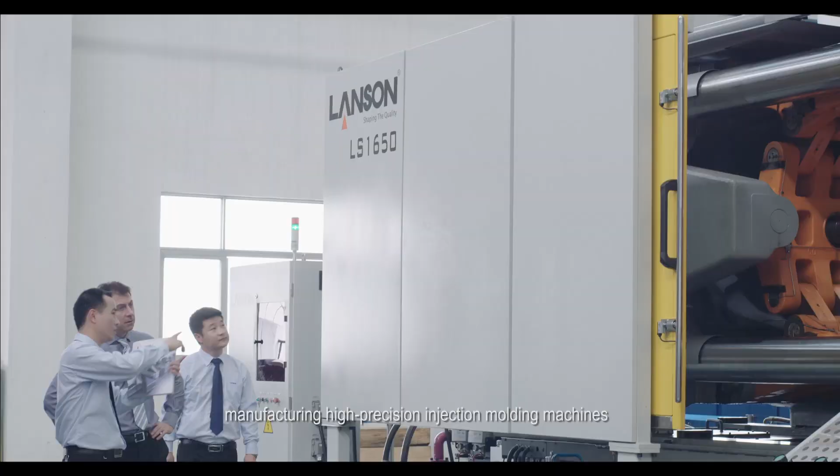Since its inception in 2005, LANSON has established a professional team of talents combined with a solid technical strength of R&D, manufacturing operations, marketing and after-sales service capabilities. It has focused on sustainable development in manufacturing high-precision injection molding machines and high-performance aluminum magnesium alloy die casting machines as its leading products. It aims to develop and manufacture high-speed, high repeatability accuracy, high stability, high precision and energy-efficient injection, as well as die casting molding machinery.

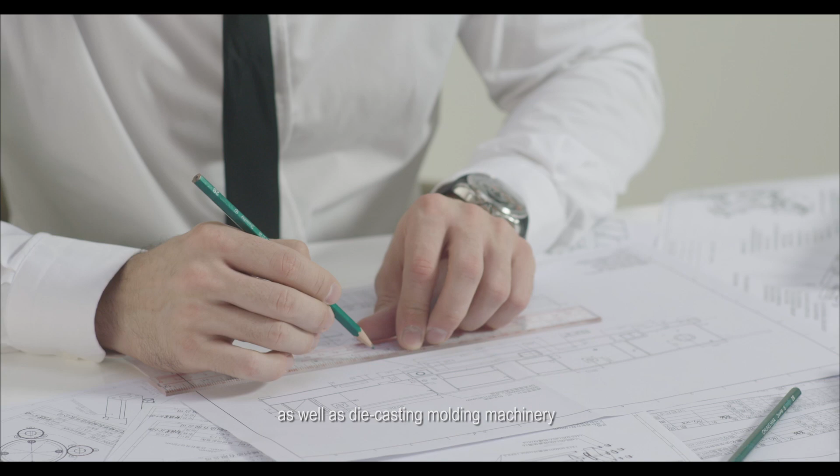The company has obtained ISO Quality Management System certification, Industry Quality Management System certifications, and numerous industry honors.

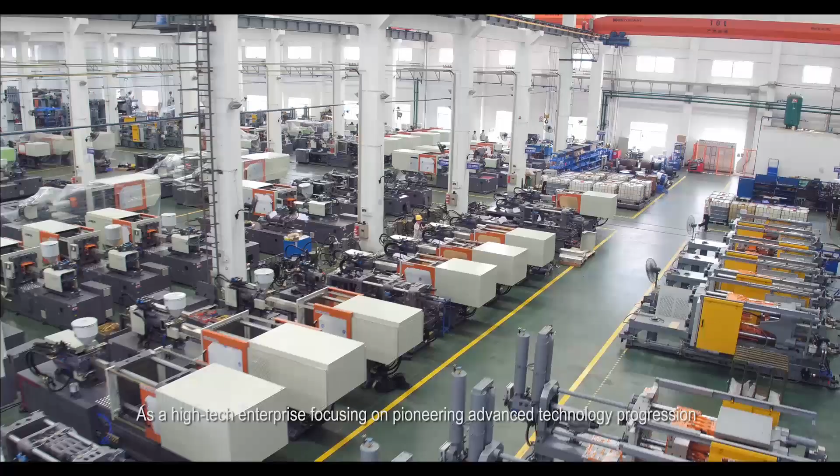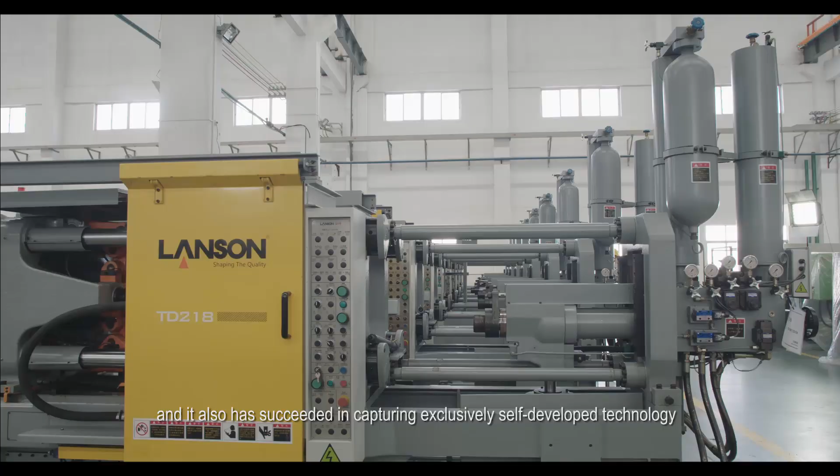As a high-tech enterprise focusing on pioneering advanced technology progression, LANSON has scored first by being the first in mass production with single-cylinder injection molding machines among industry peers. It also has succeeded in capturing exclusively self-developed technology and production capacity in building high-performance and large-scale die-casting machines. The company has achieved an annual output capacity of more than 4,800 injection molding machines and more than 2,000 die-casting machines. And the quality of all products has reached international standards and complied with industrial regulations.

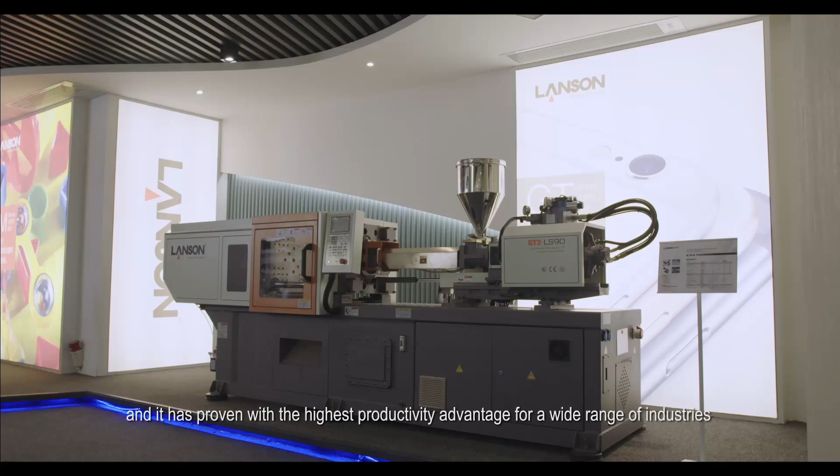As one of the industry's well-known brands, LANSON has always made its presence found in several large industry exhibitions and the mainstream media across the world. Both domestic and overseas customers have been wowed by the company's products, which have been exported to numerous overseas countries and regions, and it has proven the highest productivity advantage for a wide range of industries, as LANSON aims to work and grow together with all our valuable customers.

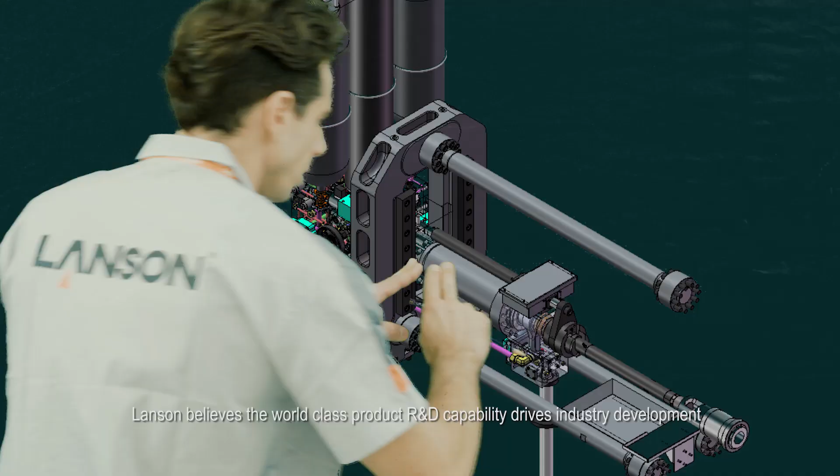LANSON believes that world-class product R&D capability drives industry development. LANSON's professional R&D team owns more than 80 senior technical engineers, awarded almost 100 national patents.

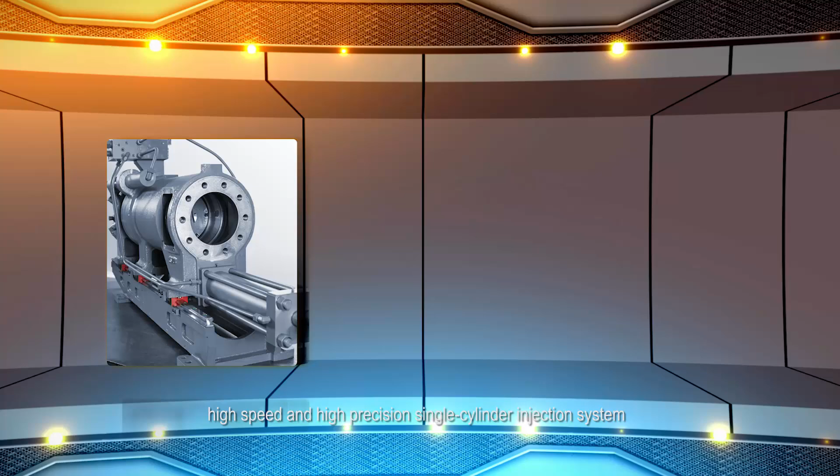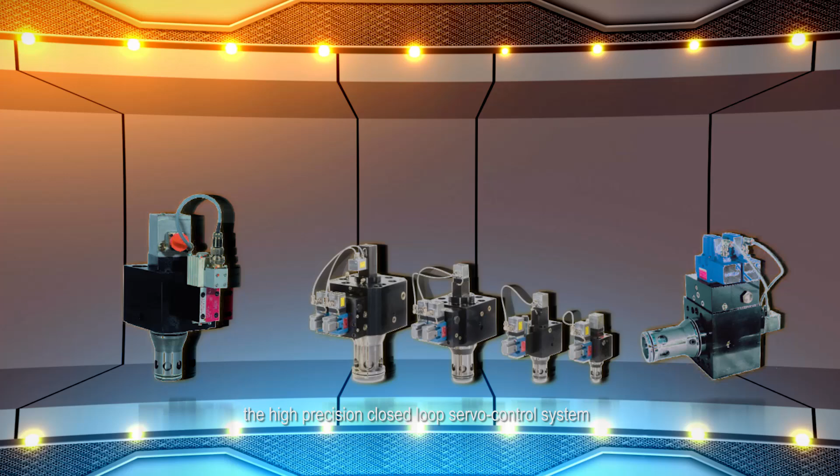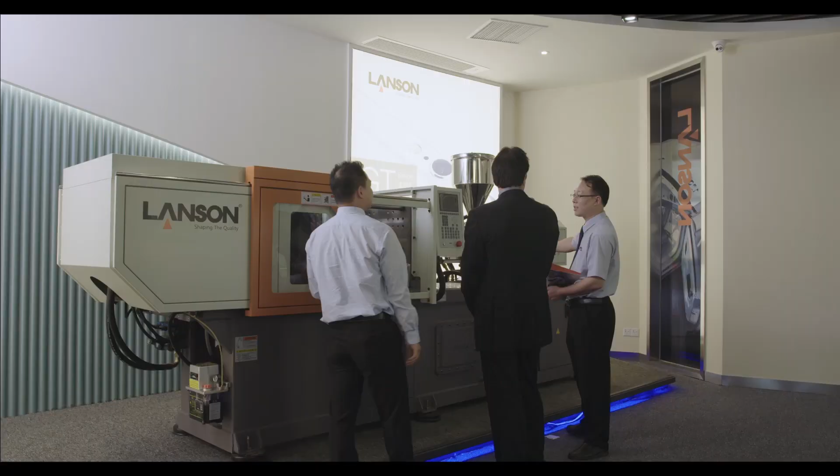The scope of patents includes high rigidity, high strength and high precision of the clamping unit, high speed and high precision single-cylinder injection system, the precise microcomputer control system, the high precision closed-loop servo control system, the stable and reliable injection system, the modular type energy-saving high-response oil circuit design, etc. And as well providing efficient one-stop service for customized application solutions.

LANSON holds expertise in manufacturing and supplying more than 15 series and over 100 high-quality prototypes of injection molding and die casting machinery, including the precision single-cylinder injection molding machines, the standard dual-cylinder injection molding machines, the large 3-platen injection molding machines, the large dual-platen injection molding machines, and etc.

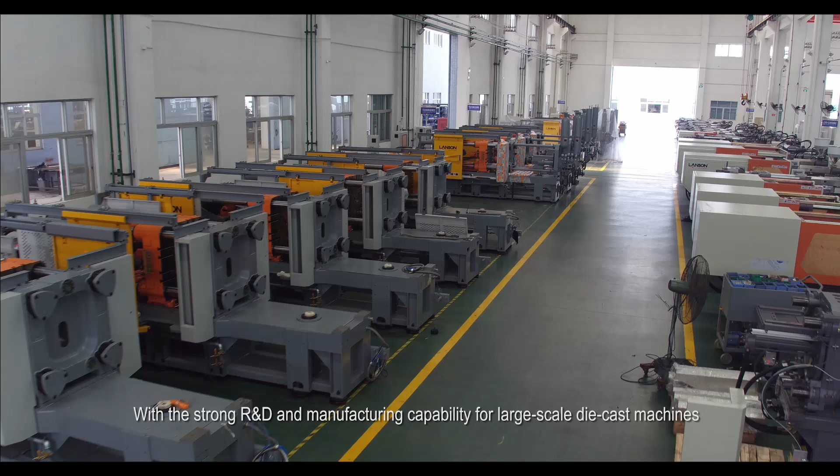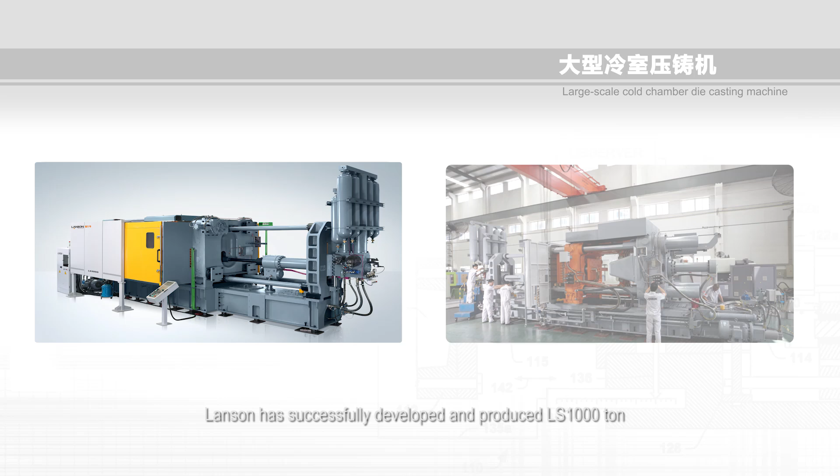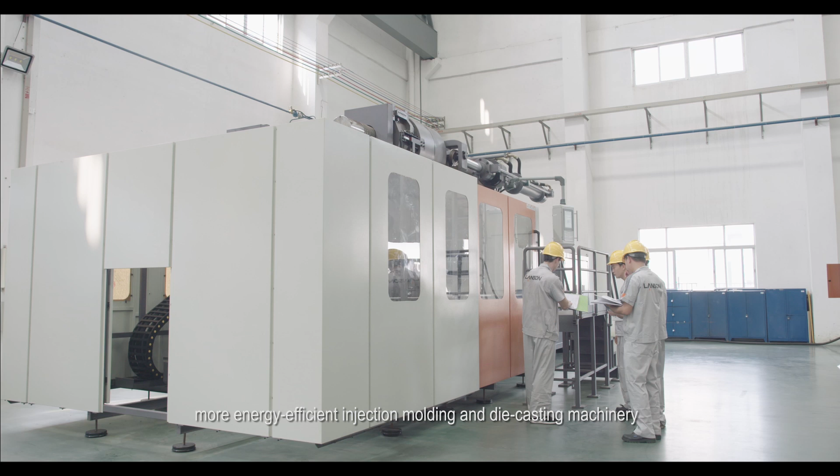With a strong R&D and manufacturing capability for large-scale die-casting machines, LANSON has successfully developed and produced LS 1000 ton to LS 5000 ton cold chamber die-casting machines. LANSON is committed to constantly developing high efficiency, high stability, high precision, high speed, and more energy-efficient injection molding and die-casting machinery to offer customers with more competitive product solutions.

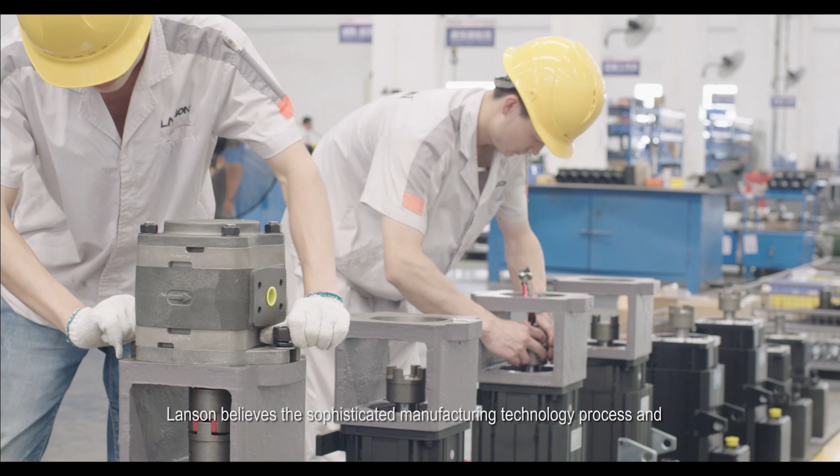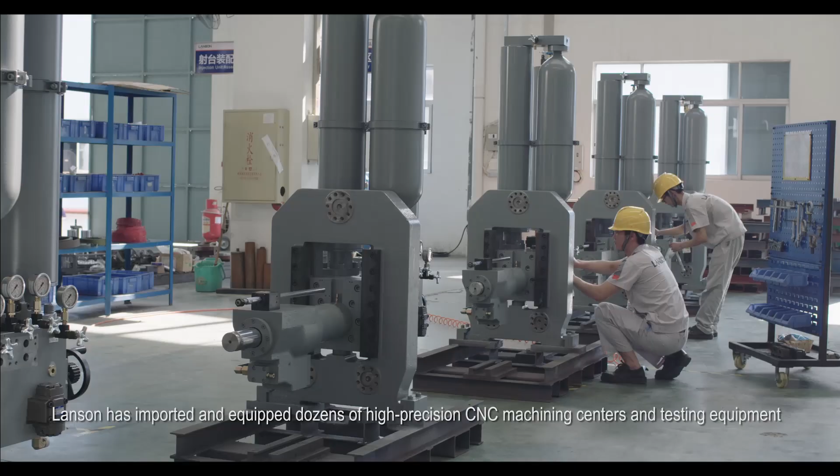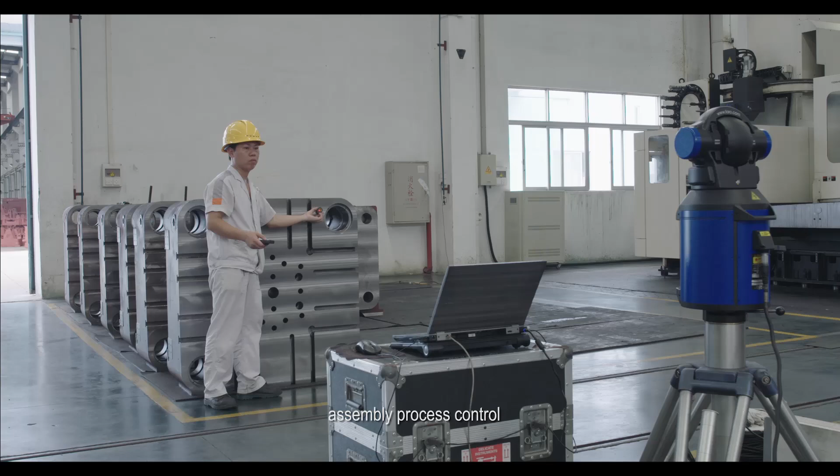LANSON believes that sophisticated manufacturing technology, process, and premium quality assurance generate customer trust. LANSON has imported and equipped dozens of high-precision CNC machining centers and testing equipment, and professional assembly technology and strict quality assurance systems have been placed in the workplace. The robust manufacturing process control, assembly process control, and manufacturing monitoring assurance ensures reliable and premium product quality.

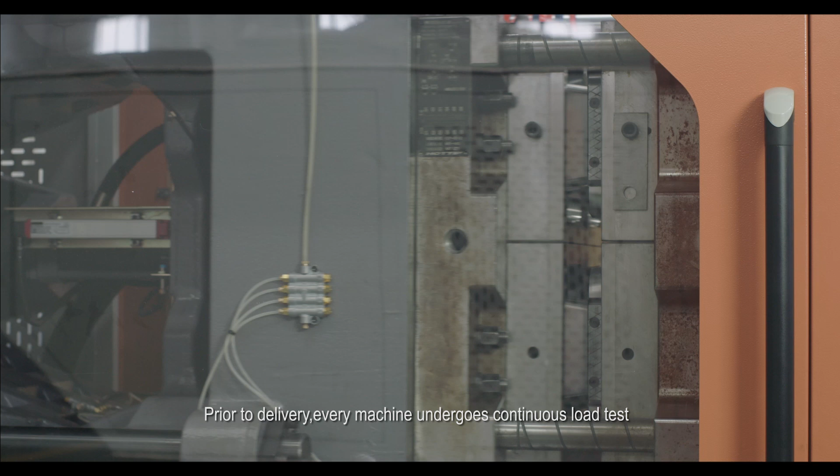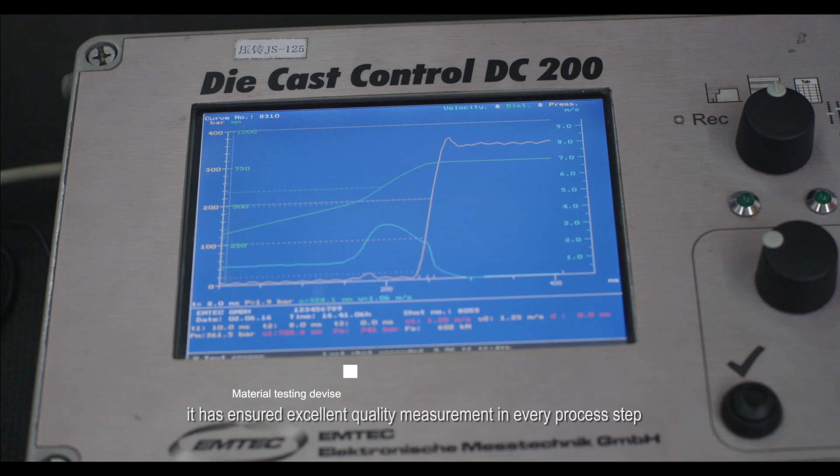Prior to delivery, every machine undergoes continuous load test, endurance test, and other strict equipment testing and detection. It has ensured excellent quality measurement in every process step, following scientific and strict regulations and instructions, to ensure perfect delivery of each product.

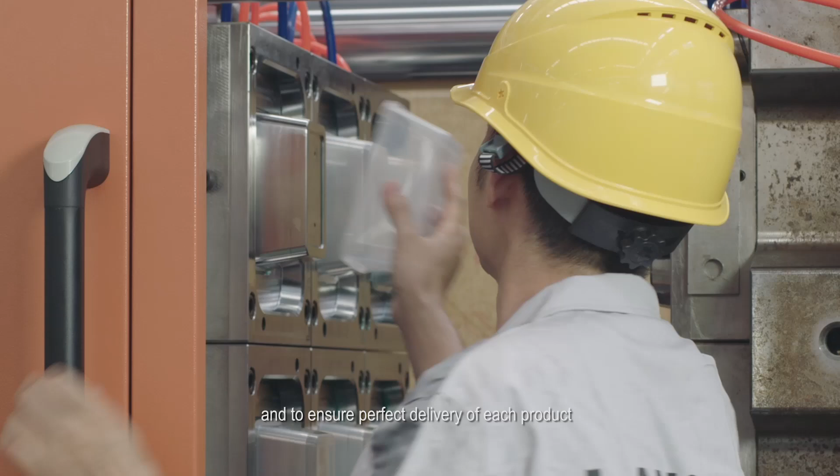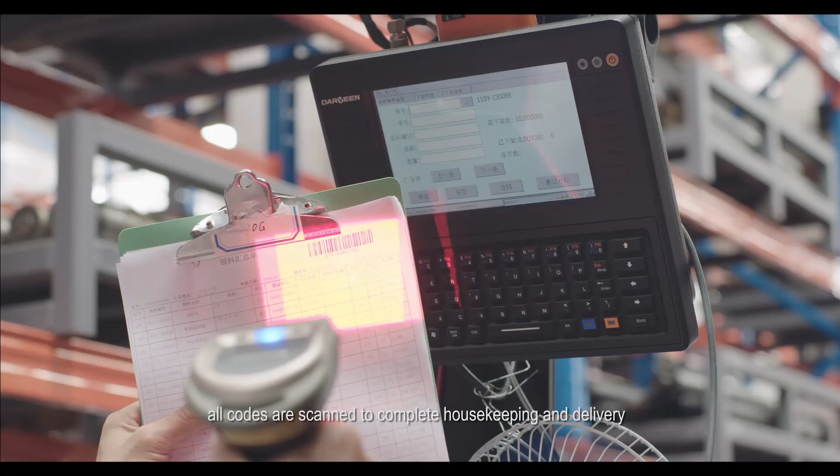The company's warehouse has adopted a 3D barcode management system, where each of the components and parts is independently encoded. All codes are scanned to complete housekeeping and delivery, immensely enhancing production process efficiency.

LANSON believes that more than good quality and stable machines, customers count on excellent and thoughtful service. Each machine is equipped with a remote computer monitoring system to promptly inform customers about production and application process parameters. The company also provides regular on-site maintenance service work with great professionalism.

With over 50 sales offices and after-sales service centers in China and overseas, LANSON has more than 100 after-sales service engineers available to respond anytime, providing customers with timely, comprehensive, and thoughtful services.

LANSON believes that only by harnessing the power of innovation we share, we shall achieve our desired future. By adding value to the customer journey, we can enjoy LANSON's social value.

With our ambitious vision and dedicated working attitude, we continue to strive for operational excellence in every aspect of our business. Adhere to the innovation path in terms of technology, production, marketing, and after-sales services, sincerely cooperating with our customers to develop a brilliant future in China's equipment manufacturing industry.